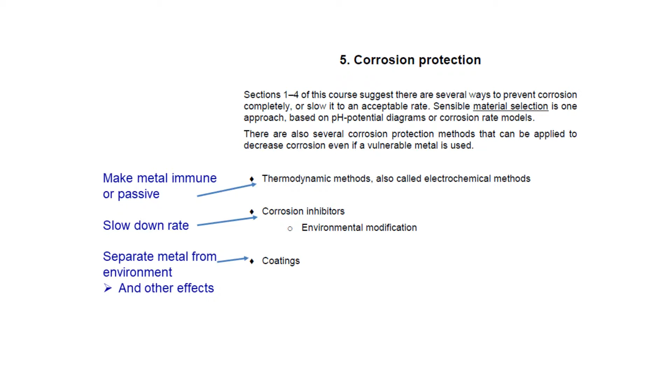Section 5.1 on sacrificial anodes talks about basically bimetallic corrosion. In chapters 3 and 4, we already looked at the algebra for bimetallic corrosion, which explained why, when two different metals are in contact and in a corrosive environment, the more reactive metal really suffers badly and can corrode much faster. The sacrificial anode concept is simply the flip side of bimetallic corrosion, because when we add this reactive metal, which oxidizes faster, we also slow down the oxidation rate of the other metal. So the other metal is protected by a sacrificial anode.

Following the algebraic methods we looked at in section 4.1, we can work out whether the protected metal is expected to become simply less active and to corrode more slowly, or even to become immune from corrosion. Which happens will depend on the kinetic parameters of both metals, the exchange current density, equilibrium potentials, etc., and the areas of the two metals. So that's some work you might have to do.

Anyway, what are common choices of sacrificial anodes? The answer: zinc, magnesium, sometimes aluminium alloys. And what are we looking for in a sacrificial anode? Well, it needs to be a metal which is more active than the metal to be protected. So any of the reactive metals, zinc, magnesium, etc., satisfy that criterion. Some reactive metals can't be used as sacrificial anodes. Titanium is reactive, but it's also spectacularly passive, and your titanium, if bolted onto some other metal, would simply form a passive titanium dioxide surface film, and thereafter it would be close to inert, and it would provide no protection.

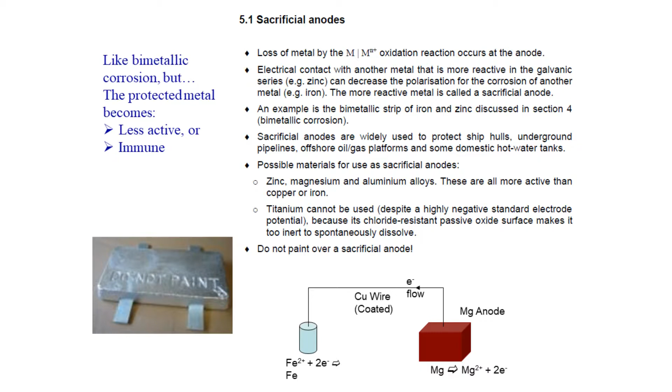Section 5.1.1 talks about typical questions or calculations which you might have to do involving sacrificial anodes. You might get some manufacturer data about the components, the individual sacrificial anode. You might have to use that data to calculate how many sacrificial anodes are required to protect a certain surface area of metal, say on an oil rig. You might need to calculate maybe the spacing between the sacrificial anodes that is produced by this.

You might have to select dimensions of sacrificial anodes, find out how much of the mass of the anodes is left after some period of time. One of the parameters you might calculate with then is this wastage rate of the anode material, which is kilograms per ampere year. So how many kilograms of the anode, which might be an alloy, is lost for every ampere of corrosion current which it soaks up from the structure. You might also have to calculate how long it is before the remaining surface area of some sacrificial anodes is too small to provide the required amount of protection, hence how often do they need to be replaced.

One final thing to remember as a comment is that when sacrificial anodes are used, they do cause the surface potential of your two-metal system to change, and the surface potential probably changes to a value where the hydrogen evolution current in most situations will be much faster than it was without the sacrificial anodes. This means that when we talked about hydrogen embrittlement as a corrosion mechanism, that can actually possibly be made worse by sacrificial anodes. It's more likely to be made worse by a powered system which applies a larger change in surface potential than is typically exerted by sacrificial anodes, but they can cause hydrogen embrittlement.

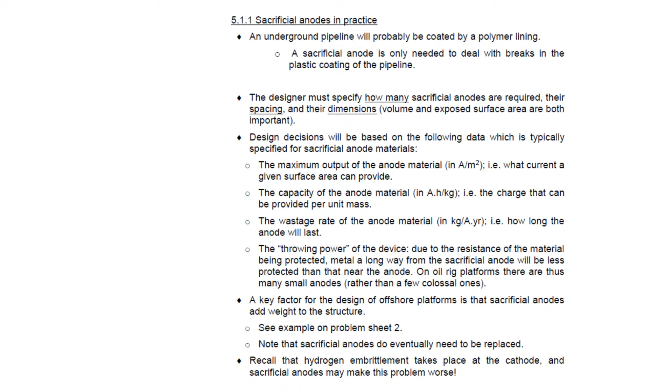Section 5.2 on page 13 is where we get to when we say that we do want to do something more high-tech than using a sacrificial anode, which seems like a bit of an early 20th century solution to us. We can say that since we are in the 21st century, we don't want to go to the bother of changing sacrificial anodes when they wear out. Instead, we can use an electrical power source to provide the same service, because all we need to do is change the surface potential of the metal object so that the metal to be protected corrodes more slowly. And we can do that with a power source in a system called an impressed current corrosion protection system, or ICCP.

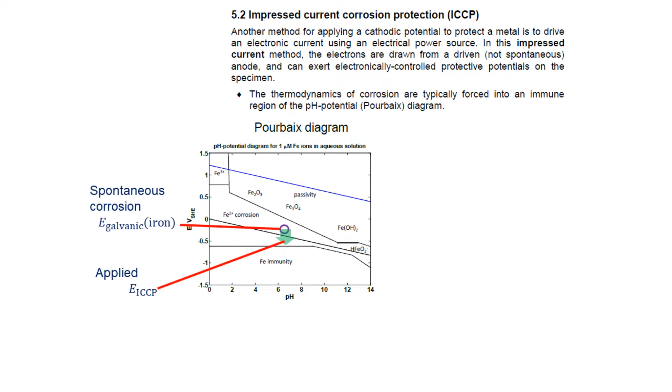On page 14, if we want to use an ICCP system to provide cathodic protection, the same kind of protection which is provided by a sacrificial anode, then we might have these diagrams to explain what's going on. So looking at the pH potential diagram or Pourbaix diagram, we might know that if we have a block of iron or steel, we might have spontaneous corrosion at some indicated condition. We find out the pH and we measure the surface potential, and we see that active corrosion of the iron is expected at some troublesomely fast rate.

In the Evans diagram for kinetics, we can find out what that corrosion rate is. We're just looking for the intersection of the lines for the anodic and the cathodic reactions as before, and the spontaneous corrosion current density is going to tell us that log base 10 of this corrosion current density is about -2 in whatever units we're thinking about, maybe amps per square meter, and maybe this is unacceptably fast. So what can we do about that? Well, pretty easily, with an ICCP system, we can apply a new potential to the surface of the metal. So we can apply some E_ICCP by some sort of powered electronic system, and this has the effect in the pH potential diagram of moving our situation close to the border between immunity from corrosion and active corrosion.

Now, suppose we can do that. We now find on the Evans diagram that we have a lower surface potential, which means that when we look up the current densities for the two processes, we see that the corrosion current density for the iron has decreased by a couple of orders of magnitude. So that's excellent. The iron is now going to be actively corroding, but barely, only at a very slow rate. The cost of that is that the hydrogen evolution on the iron surface is now proceeding at quite a fast rate, and the currents no longer balance. The anode current density is no longer of the same size as the cathode current density, because there's much more of the cathodic hydrogen evolution happening.

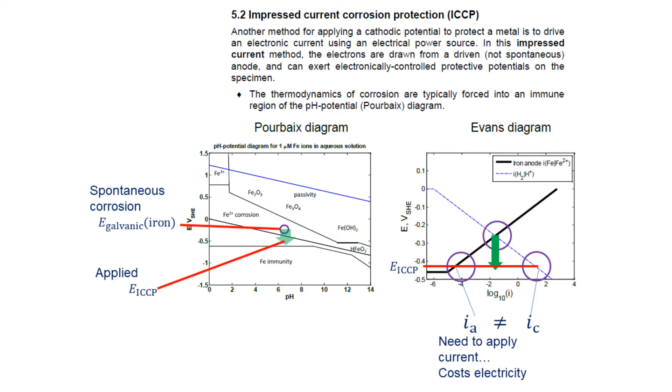Well, if we have something like an oil rig or a ship, the driven anode could simply be an electrolytic process happening in the ocean water next to the metal which is being protected, the ship's hull. We could have in those cases something like a platinum mesh, a nice good electrocatalyst, and with our power source, we could be driving this to a surface potential where the anode process takes place.

If this was in fresh water, then an anode process might be oxygen evolution. In seawater, a process which happens more readily, and therefore instead of oxygen evolution, is chlorine production. This means we potentially need to be careful and avoid using ICCP in seawater if you're concerned about producing chlorine and you're worried about the fumes from that.

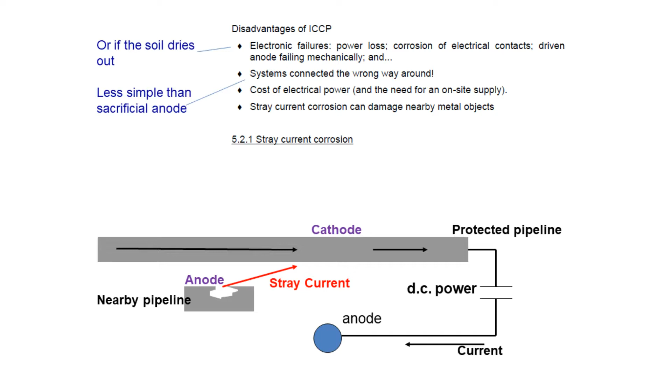Now the petrol pipeline was very sensibly and prudently protected by an ICCP system. It was providing cathodic protection, so the petrol pipeline, as installed, was well protected against corrosion. The water pipeline, meanwhile, was, I believe, galvanized, so it had a certain amount of protection from corrosion. However, this system suffered from stray current corrosion.

It is in fact because of the risks of this kind of failure caused by cathodic protection systems that one of the biggest advances in corrosion engineering in recent decades has been the adoption of anodic protection as a method to prevent corrosion of iron and steel components. So anodic protection is in section 5.3 on page 15.

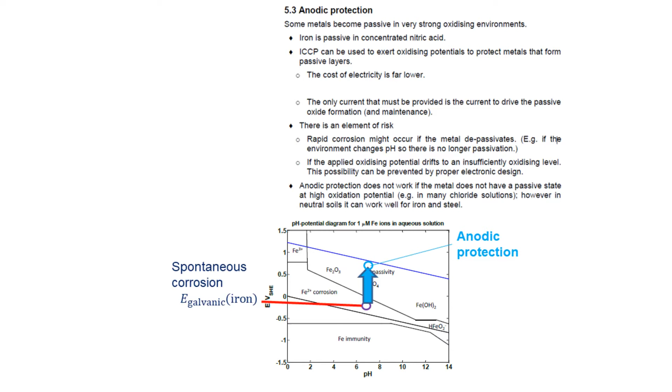We have the useful observation that when we looked at the pH potential diagram for iron, we saw that it was one of the metals which actually becomes passive in a very strong oxidizing environment. Iron, for example, is passive in concentrated nitric acid. That's potentially a risky thing to do, to store concentrated nitric acid inside iron containers, but it could potentially be done because the iron should remain passive against corrosion in the strongly oxidizing acid.

Anodic protection looks at this aspect of the pH potential diagram, that is, for iron and some of the other transition metals, the fact that they have a higher solid oxide which provides passivity in highly oxidizing environments, and it says that we can exploit this using a powered corrosion protection system, if we apply not a more cathodic potential, which we did previously, but if we actually deliberately apply a moderately strong oxidizing potential to the surface of the iron.

So the sketch for what we're doing looks very similar. We could draw it on the same diagram you have on page 14. We had the initial idea that spontaneous corrosion of iron is expected to happen. Suppose this is for a pipeline. But if we now use our powered corrosion protection system to change the surface potential of the iron pipeline and make it more positive, we can actually move it into the passive regime. So we're actually making the iron more anodic.

This actually has some quite striking advantages, which is because we now have an anodic protection system where the protected iron is passive and anodic instead of borderline immune from corrosion where it would have been a large net cathode. This means anodic protection is potentially much cheaper than applying cathodic protection because we don't have to supply the large current required to balance out the hydrogen evolution which we had on the cathodic protection system.

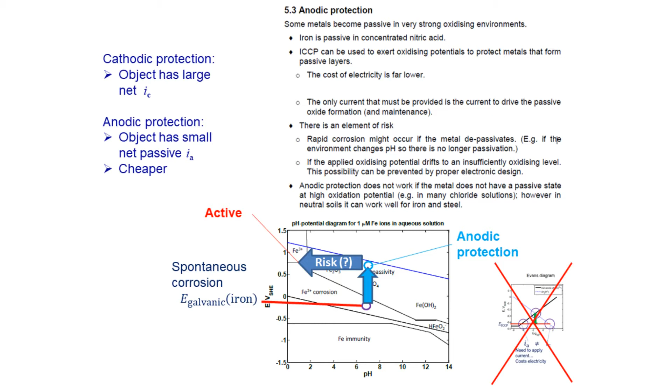Okay, now if we go on to page 16 with section 5.4 on inhibitors, we'll have finished talking about thermodynamic methods of corrosion protection. So we've now finished talking about simply using engineering techniques to make a metal immune from corrosion, or nearly immune, or passive against corrosion. Instead, in this section on inhibitors, we're going to look at kinetic methods of preventing corrosion, in which we say it's okay if my metal object is corroding actively, so long as I can use a different technique to slow down how fast it corrodes so that it easily lives out its service lifetime. There are various ways to do this, based on the insights from Chapter 3 on the kinetics of electrochemical corrosion.

The absolute key thing to remember here was that electrochemical corrosion involves an oxidizing agent, that's a cathode reaction, and the metal undergoing oxidation, that's the anode. Inhibitors can successfully slow down overall corrosion if either one of those mechanisms can be slowed down and made rate limiting, because they happen in series. So then, let's talk about slowing down the cathode reaction first in section 5.4.1 on cathode inhibitors.

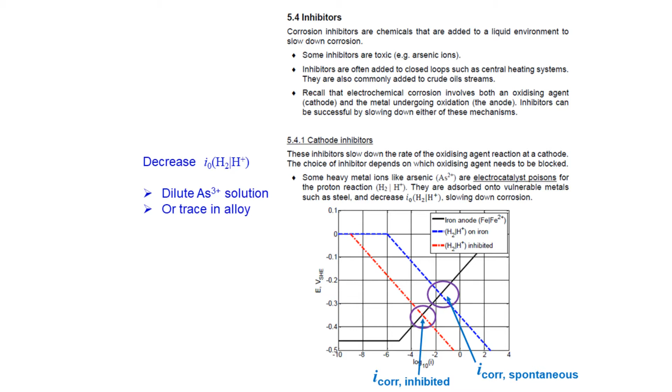That's the arsenic example as a cathode inhibitor for the hydrogen reaction. So that's when the relevant cathode reaction or oxidizing agent is dissolved hydrogen ions in water. We have a different kind of inhibitor that we'd consider if our oxidizing agent is dissolved oxygen.

The reason for that is that we recall dissolved oxygen very often causes corrosion at a rate that is diffusion limited. And so changing the exchange current density by decreasing it with some sort of electrocatalyst poison often won't actually decrease the rate limiting step when we have corrosion caused by dissolved oxygen, because the kinetics will still be sufficient to cause all of the oxygen reaching a metal surface to react with it and cause corrosion.

So if instead we have a situation of oxygen and we want to slow down the rate of this dissolved oxygen causing corrosion, then the best way to do that is to slow down the diffusion limited rate at which the oxygen is supplied to the metal surface. Of course, you can do that by removing oxygen from solution so that it's low concentration, hence low diffusion limited supply rate. One of the more interesting ways of doing this to cut down the diffusion limited rate of oxygen supply is actually to operate in a system which fills up with lime scale.

Or we can deliberately cause lime scale to build up on the inside of some water pipes if we were to make them mildly alkaline solutions containing zinc or magnesium ions. Then we'd end up with a thin hydroxide scale on the inside of the pipe, and this solid scale would create a very nice diffusion barrier that slows down oxygen reaching the metal and slows down overall corrosion.

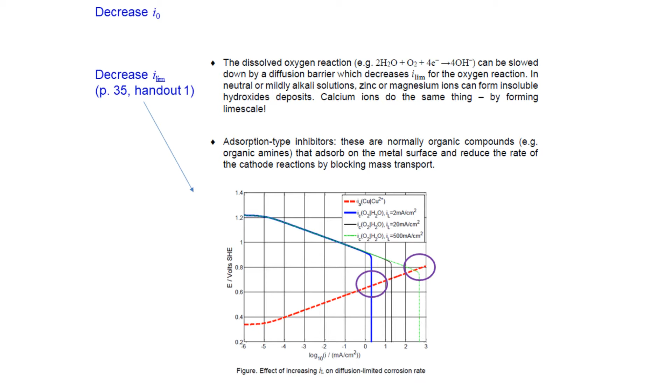Okay, those were cathode inhibitors. In section 5.4.2 on page 17, we can also talk about anode inhibitors. In this case, we're talking about slowing down the rate of the anode half reaction in a corrosion process. So these things are typically said to work by making the metal surface become passive. For example, some corrosion problems might happen, and this is an exotic one, simply because passivity breaks down on my metal surface.

A striking example of this is titanium when it's used for handling crude oil, which actually turns out, unfortunately, to be chemically dry crude oil containing no water but containing methanol. In this case, the normal situation of titanium breaks down because we'd normally expect titanium to have a titanium dioxide surface providing very strong passivity against corrosion.

But in the complete absence of water, passivity cannot regenerate on your titanium, which means that once the oxide film becomes scratched off, you have reactive titanium metal, which actually undergoes an unfortunate reaction with pure methanol, and the metal will break down. In this sort of situation, we can talk about an anode inhibitor. We can talk about deliberately adding water to what would otherwise be an anhydrous stream of crude oil.

The presence of water then provides the ability of metals like titanium, and this also applies to stainless steels in some situations, to reform their passive oxide surface. In this case, I've provided anode inhibition. I've slowed down the rate of corrosion by making sure that the metal is behaving in the passive way that you expect it to behave.

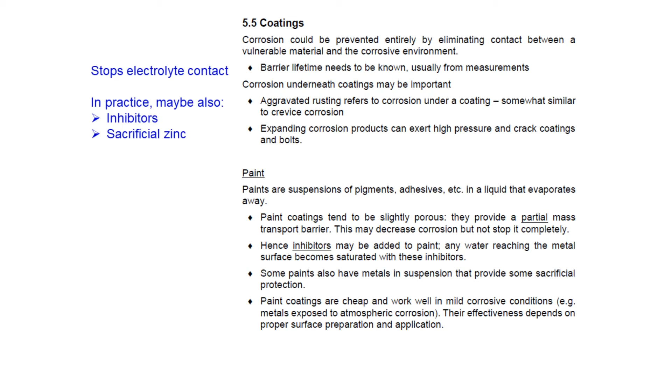Hence why paints often do contain, say, zinc particles as a sacrificial anode or corrosion inhibitors. On the plus side, paints are very cheap, and they work very well if the conditions are only mildly corrosive. We say some things about plastics, rubber and glass coatings, all of which exist. They're more difficult to apply than paints, but they potentially provide resistance to all kinds of chemicals.

If you're looking at Teflon or glass, they're often completely unreactive or inert in whatever chemicals you're containing. A slight issue is that they can be more fragile because you might be looking at layers of quite brittle materials in the case of glass. In the case of Teflon, you have some potential problems with detachment of the layers.

We also have sometimes metallic coatings. Zinc is the one which there's a really good ability to apply to all sorts of components, so that we now expect in the auto industry car parts surely should come coated in zinc if they're steel parts, to protect them from corrosion. And this obviously provides both a mass transport barrier that stops the environment touching the steel. It also provides a sacrificial anode in the case that the coating gets scratched and there is some way that the steel could react with the environment. Then it won't, because the zinc will be a sacrificial anode.

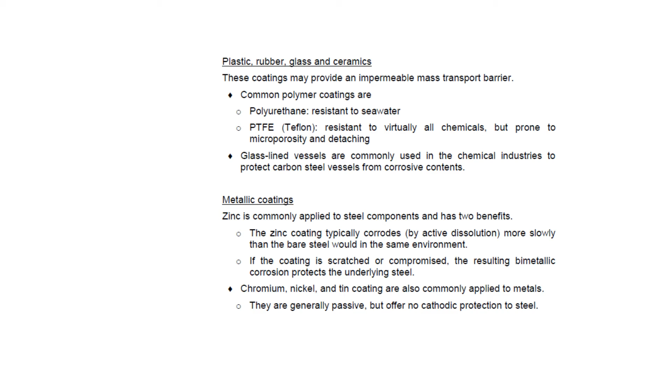And another thing to say about zinc is that its kinetics for dissolution are quite slow. So even though you think it's a reactive metal and it's going to be lost quickly, its exchange current densities are low enough that it's lost fairly slowly, and it's a good coating. Other kinds of metal coatings, chrome, nickel, tin, these are very commonly used as well. These things are often passive, but they don't offer cathodic protection to the steel, because they're not substantially more reactive than the steel. In the case of chromium, they're not more reactive because they become passive.

Okay, so we've talked there about coatings, and in section 5.6 we just talk about a couple more corrosion control methods. One of them is robust design. This means if we're answering how many years this thing is going to last, we might be doing robust design so we have thick enough walls or thick enough metal that it's going to last even when we've allowed for some wastage rate because of active corrosion. That might in some situations be better than providing a corrosion protection system if we can't rely on the corrosion protection being observed and maintained. Of course, it does mean that we're looking at a finite lifetime.

Alternatively, robust design also means things like preventing water pooling on some metal that can corrode, or if we have a process stream, filtering out entrained solids or sands as early as possible so that they're not going to cause erosion corrosion. What else can we talk about? Environmental modification. So corrosion is chemistry. So one thing we can do to slow it down, in the same way we can slow down almost all chemistry, is to decrease the temperature. So if we have a process stream which at some point we're going to cool down anyway, then we should cool it down as early as possible so that it's less corrosive to the metal downstream.

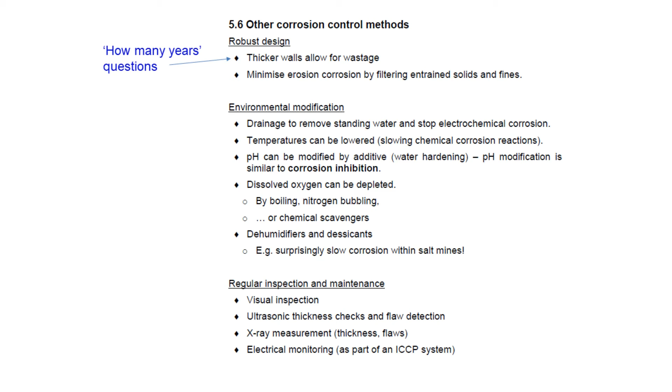Okay. Final thing to say, an important part of corrosion engineering is inspection and maintenance. I don't have a lot to say in this course on this subject because this course is more to do with the algebra and principles of corrosion. But inspection and maintenance can be visual inspections for the amount of corrosion or whether localized corrosion has happened in a particular place. We could be looking at ultrasonic checks on the thickness of a reaction vessel wall. We could do X-ray measurements to look for parts which are becoming thin because of, say, pitting corrosion. We could also include in an ICCP system electrical monitoring so that we know if the system is continuing to apply the protective potential it should be and whether it's providing a sensible amount of current in order to provide this protection.